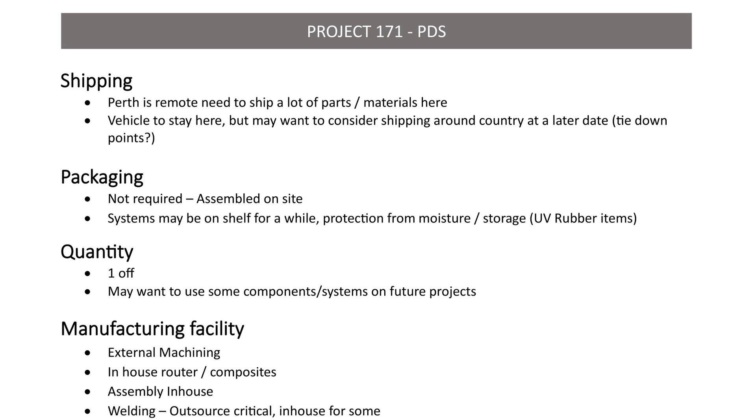A product design specification is part of the design process, and in particular we've been looking at the application of Pugh's total design to the design of a custom sports car. This document is a live document that covers a lot more than just the intended performance of the vehicle. It will cover things like the manufacturing techniques that are going to be used, materials that might be applied to the vehicle, legal constraints, documentation and testing requirements, and a lot of other specifications relevant to the design of the vehicle.

These can be put together as dot points that can be updated as the project continues, and this is particularly important as we head into the conceptual and detailed design phases, where new information is undoubtedly going to affect our specifications. In previous videos, we've discussed some of the performance targets of this vehicle, but in this video I want to cover some of the other aspects of the specification that have influenced some of the major decisions made in this project so far.

One of the first questions you're going to ask whenever designing any sort of product is, what sort of environment is it going to be used in? This car is going to be built in Perth, Western Australia, and Perth is a hot, dry location. We only get about 100 days in the year where there's any sort of rain whatsoever, and this provides a really good opportunity to create an open-top car or a speedster.

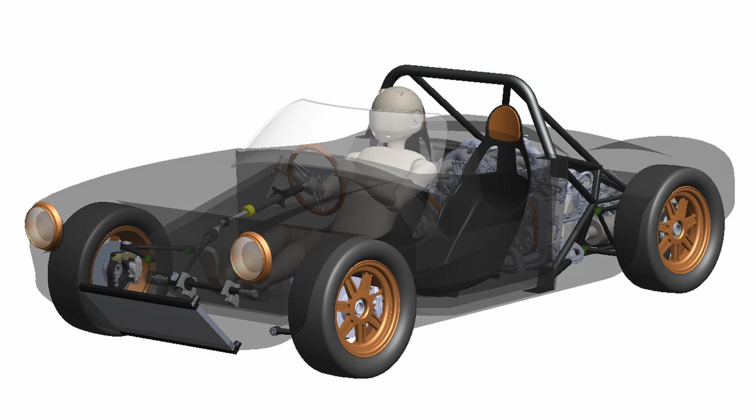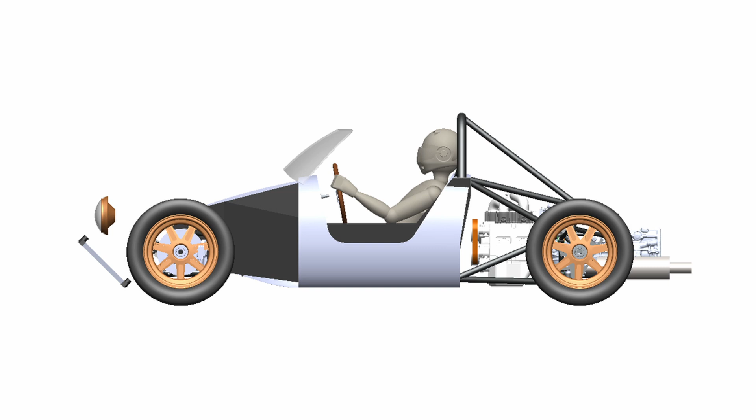Previously we have mentioned the desired performance of the vehicle. We are aiming for a 0 to 100 time of less than 6 seconds, and probably something that's cornering at between 0.9 to 1G on normal road tyres. To achieve this with a relatively low budget, that's going to mean we're going to need a small car. A small car is a lightweight car, and a lightweight car that wants to accelerate at a reasonable speed is going to need a less powerful and, more specifically, a less expensive engine.

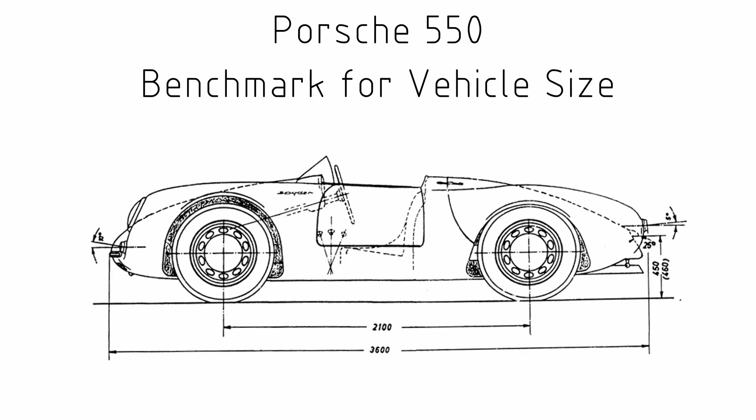So in the specifications, we chose a size that's representative of one of the benchmarks we chose, the Porsche 550. This is a starting point for the size of the vehicle, and as we go through the project, this is undoubtedly going to change as we start doing the conceptual and detailed design of some of the components and systems of the vehicle.

Speaking of budget, the budget for this car is — I might need to bleep that out, my wife does watch these videos and I don't think she needs to know all of the money stuff just yet.

But to put it in perspective, some of the benchmarks we chose are listed here, and we have an idea of what they cost. One benchmark was a Mazda MX-5, and new they go for 50 to 60k Australian. A Lotus Elise at the moment you'd be looking at between 50 and 140k, and an Austin Healey between 60 to 90k. A Lotus 7 style kit car, anywhere from about $25,000 to $50,000 Australian. So that gives a fairly wide range of between $25,000 and $140,000 Australian.

Now, obviously, when we start these projects, sometimes it's necessary to be a little bit optimistic with the values we're going to use for our budget. Otherwise, we might not be stupid enough to even start the process. But there are ways to keep the costs down.

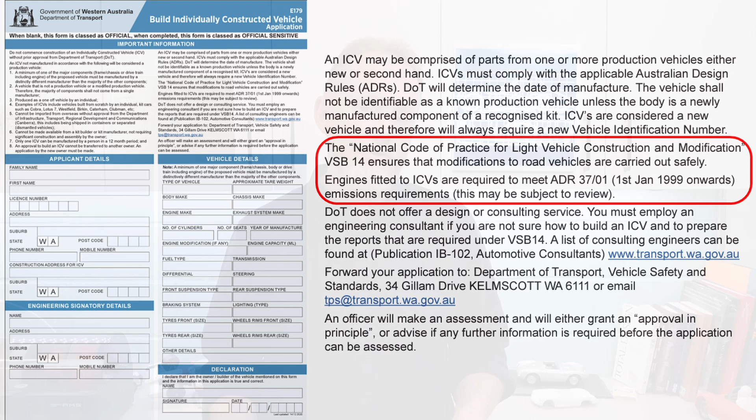We're also going to meet some of the requirements around the registration of the vehicle, where many of the parts and systems will need to be compliant with Australian Design Rules, or ADRs. These have been summarised in Vehicle Standards Bulletin number 14, and there's a lot of documents here, really too much to unpack in this video.

Another thing a donor vehicle allows for is a more reasonable timeline for the project. It's great to have a lot of customized parts, but every time we're doing a customized part or system, it adds time to the project, whereas a suitable part or system from a donor vehicle can cut that back quite a lot.

I actually quite like the idea of recycling a vehicle and reusing and repurposing some of those parts, much like we see with the Austin Healey, where parts were originally designed for a much more mundane vehicle and then found their life in a much more exciting sports car. That's something that really appeals to me.

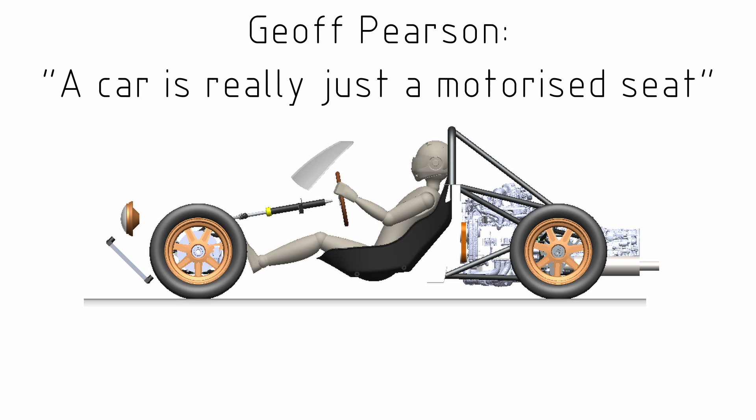Thinking about these issues of budgets and timescales and what's likely to be possible in this project, where we want to keep the quality quite high, it's going to be very important to make sure this car has the minimal number of systems it needs to perform its duties and be the car it should be. A minimalist car is going to be a lightweight car, which is great for performance, but it's also going to be cheaper and take less time to design and build.

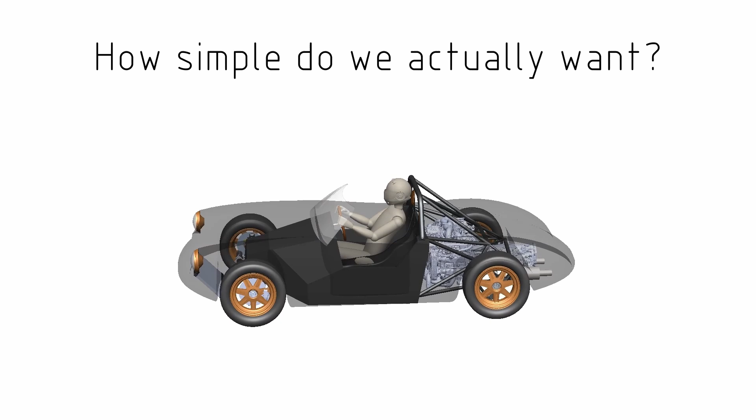Just how minimalist we want to make the vehicle is something we'll need to explore later during the conceptual and detailed design phase. For example, we could minimize the systems on the car by removing something like doors and just having a car without doors, which would avoid all the extra safety requirements around the structure of the door.

But it will mean things like it's much harder to access and get in and out of the vehicle. So we're going to see these sorts of knock-on effects as we go through the project, and sometimes we'll be revising even some of these early decisions as the process continues.

Another example of creating a minimalist car would be to eliminate seats and mold them into the structure of the chassis. When we look at these approaches to minimalism, we start to see conflicts with other parts of the specification. For example, one of the specifications is that I'd like this to be a vehicle my wife can drive and enjoy driving as well.

Now, one of the problems with that is that in imperial units, I'm about 6 foot and my wife is about 5'2", and that means there's quite a sizable difference between us driving a vehicle. There's going to be very different ergonomics requirements, and that's going to be very hard to meet in a minimalist vehicle if we're not including adjustability in the controls and things like adjustable seats.

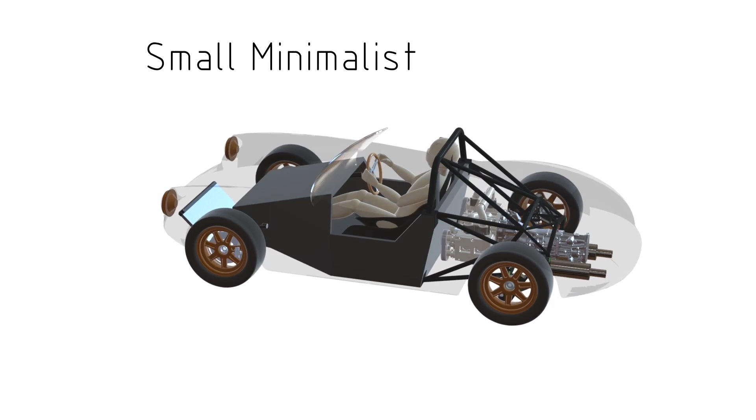So at this stage, we know that the car is going to be a small minimalist speedster that uses a lot of components from a donor vehicle. And this latter design decision really leads to another fundamental decision, which is that this car will be a mid-engine vehicle.

As soon as we accept that we're going to need a fairly modern donor vehicle and something that's reasonably affordable, it means it's likely to be a front-wheel drive vehicle with a front engine. Now, it's fairly obvious that we're not going to be building this car to be a front-wheel drive vehicle.

It's something I'm almost certainly going to cover in a later video when we start to get into vehicle dynamics.

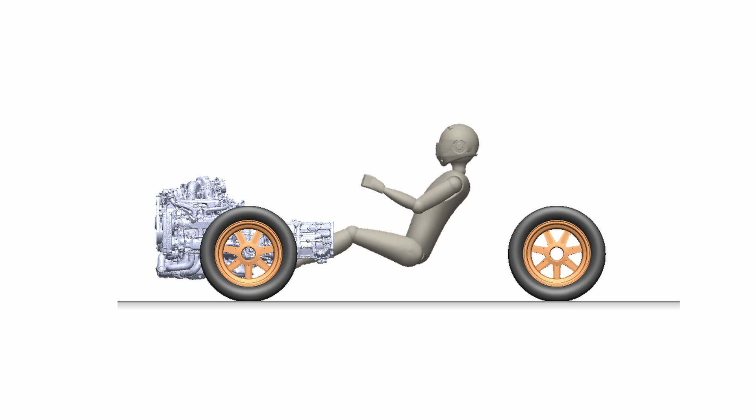The most obvious way to turn a front-wheel drive powertrain into a mid-engined rear-wheel drive car is to take the powertrain and engine from the front of the vehicle and move it to the rear.

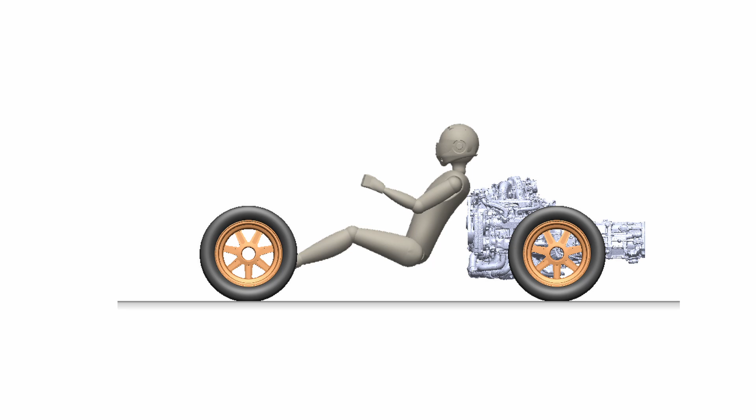Now this has a couple of really good advantages. The first is that the engine ends up being quite close to the driver, which makes for a low polar moment of inertia of the vehicle, which is going to help it accelerate or rotationally accelerate into corners. The other is that it's going to end up with a lot more load on the rear tires.

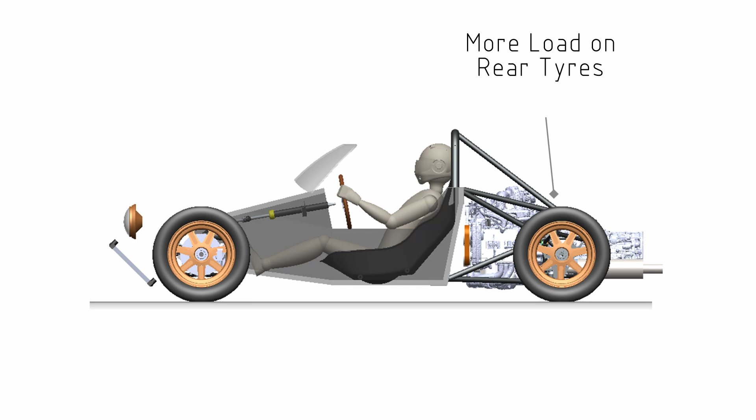As the center of gravity is more rearwards, this is going to mean we're going to have more grip under acceleration conditions, which is going to make that acceleration time of sort of 0 to 100 in 6 seconds much easier to produce when we've got that extra traction.

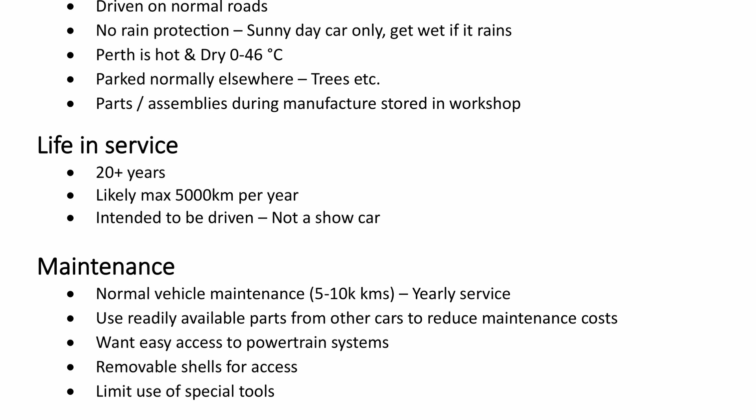Now there are a lot of other things that are really quite important in the specification documents, and one of these is that this car is intended to be driven. It's not going to be a show car, and that's really going to come into play with the level of quality we're trying to achieve.

One of the things I really like in cars is what I'd call truth in materials, where the materials are really what they're supposed to be. If the vehicle is made from aluminium, maybe you are keeping that aluminium in the bodywork as raw aluminium, or you're painting it a light metallic color.

You might be using leather. You're going to make sure that that is not a garish color, that it's closer to a natural color that the leather might be. And if you're using bits of wood as accents in the vehicle, so a wooden steering wheel or a wooden gear stick knob, that you're using fairly simple finishes on those components.

Now there are some parts that this specification doesn't make obvious. For example, I don't really know whether this car is going to be a space frame vehicle or use a composite monocoque, and I'd really appreciate your comments and feedback on which way you think this project should go.

In some ways, I feel far more comfortable building a monocoque chassis or composite structure. I have some experience building structural composites, and I'm a really bad welder. So it really does point me in that direction as a starting point.

Now the main downside of using something like a composite material in the chassis is just the cost involved. And there is a bit of an overhead when we start to look at the testing required to prove structural rigidity, structural strength, and some sort of equivalence to a steel structure.

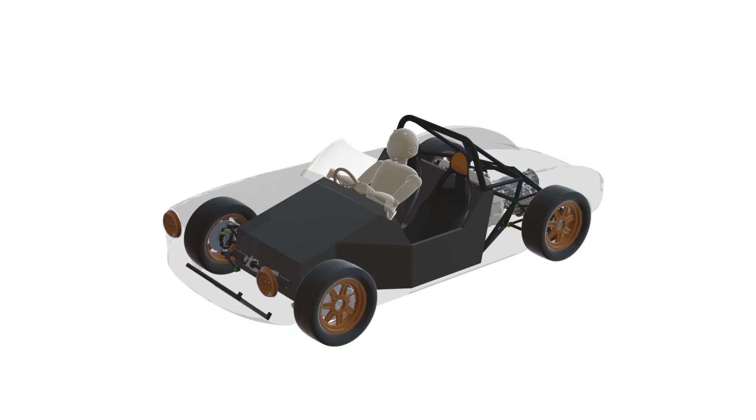Now there's a lot more decisions to be made in this project, and there's a fair amount of time required to do that. But even going through the specifications, we've been able to clearly show that what we're trying to build is going to be a small, minimalist speedster that has extensive use of donor components. And these components are going to enable us to meet both our performance targets as well as some of our legal requirements for the registration of a vehicle like this.

Now I didn't want to bore you in this video by going through a step-by-step run through of a product design specification, but I hope I have showed you some of the more interesting ramifications of this document and how it's influenced some of the major design decisions, as well as showing you some of the images of the conceptual model so far.